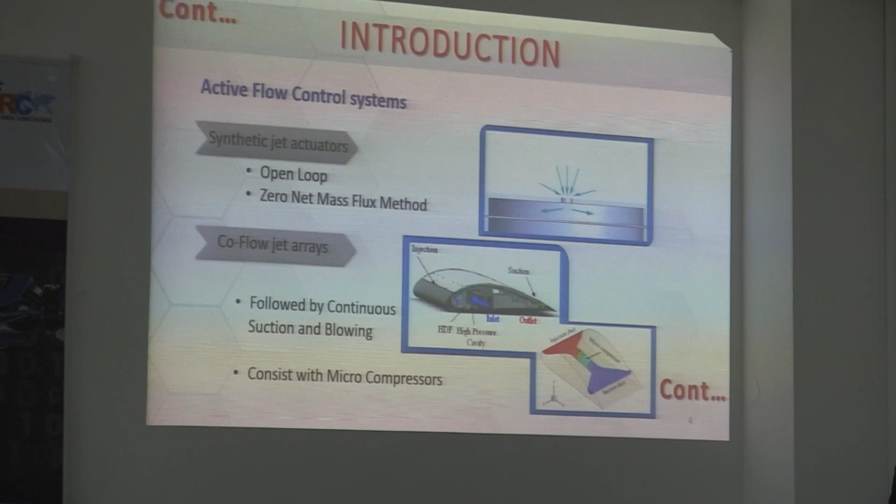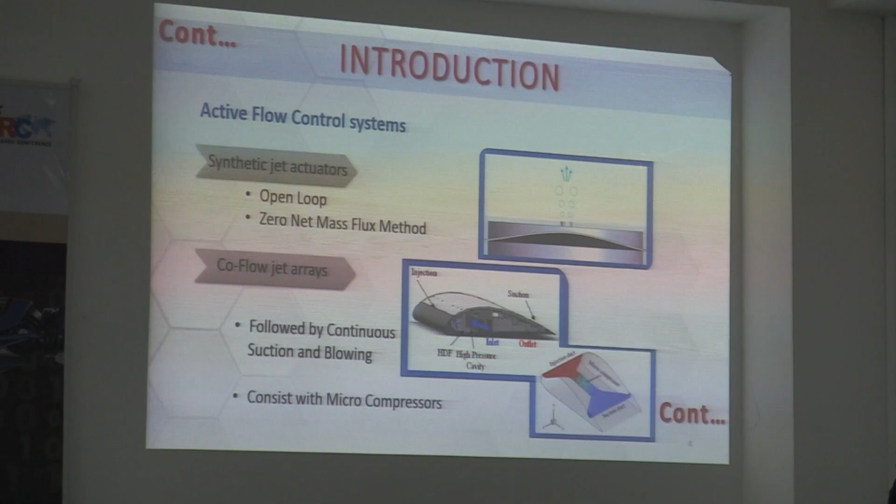There are many types of flow control methods. The synthetic jet actuators are known as open loop, and it is a zero net mass flux method, that is, the in and out mass flow rate is the same. The co-flow jet arrays are the method that we were concerned with. It uses continuous flow as suction, and it consists of microcompressors.

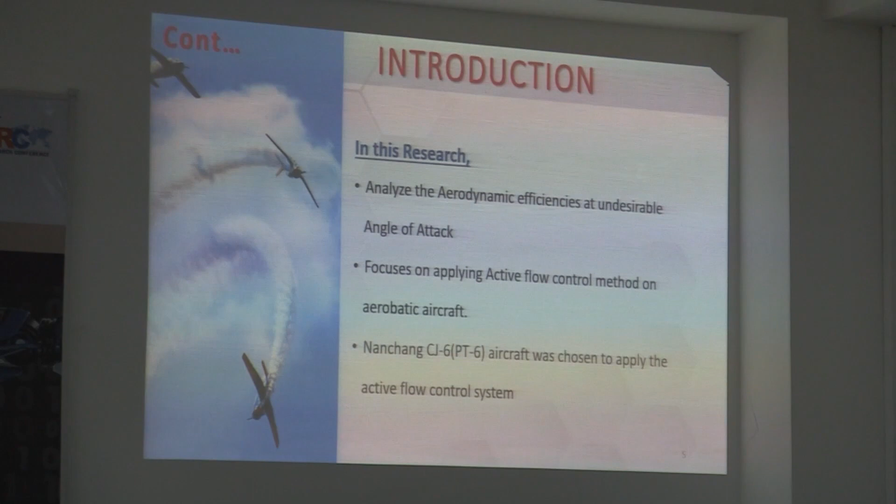This research was based on analyzing the aerodynamic characteristics at undesirable angles of attack, and therefore we focused on obtaining detailed data for the wing. For the wing we chose an aerobatic aircraft. Then we selected the PT6 aircraft. It is in the Sri Lanka Air Force fleet. It is currently used for aerobatic and fighter conversion training.

There are three main objectives in our research. The first one is to select an appropriate location to apply this suction and blowing, and the next primary objective was to implement the suction and blowing profiles in order to carry out the CFD simulation, and finally to assess the effectiveness of the application of suction and blowing.

There are four main sections in our methodology. The first one is the solid modeling, involving modeling of the original wing and the modified wing. Then the mesh generation, then CFD analysis, and finally the post-processing.

For the active flow control method, the initial idea was generated by studying the principle of synthetic actuators. Basically, it's a dual phase suction and blowing. In this research, we converted it into a single phase suction and blowing, that is, we placed one slot to suck the air, and then that air will be blown from another slot. And finally, it satisfies the law of continuity.

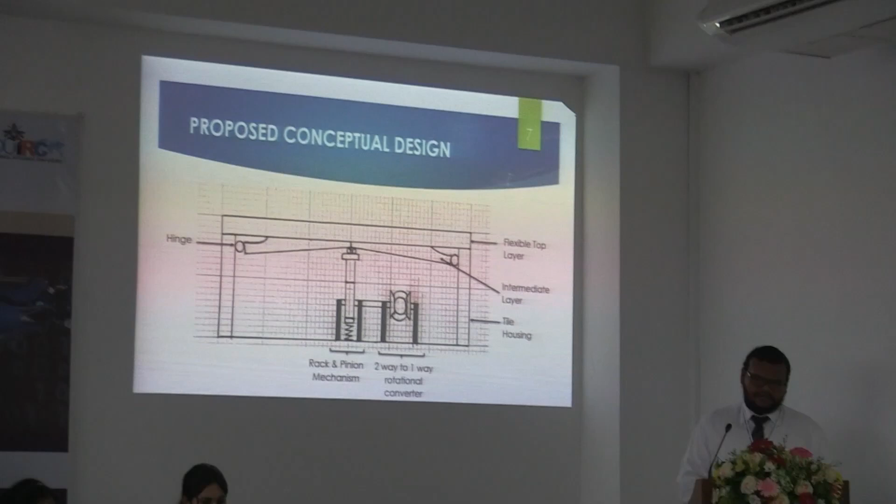So this is the conceptual design we proposed in the initial stages of the design, and we were able to go forward with it. This includes a flexible top layer, and below that is an intermediate layer. So this intermediate layer consists of 4 triangle-shaped layers, which are hinged to the side of this tile. So the vertical motion is converted to rotational motion through the rack and pinion, and the alternating rotation of the input shaft is converted to one-way using the two-way to one-way rotational converter.

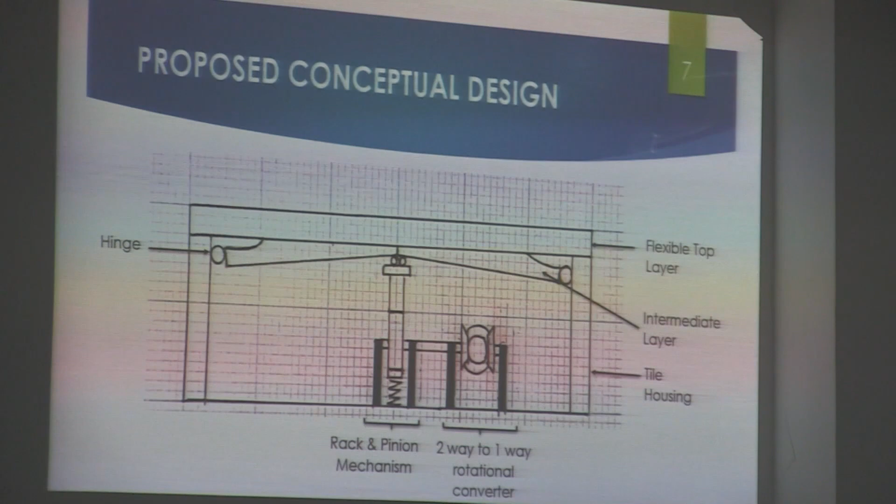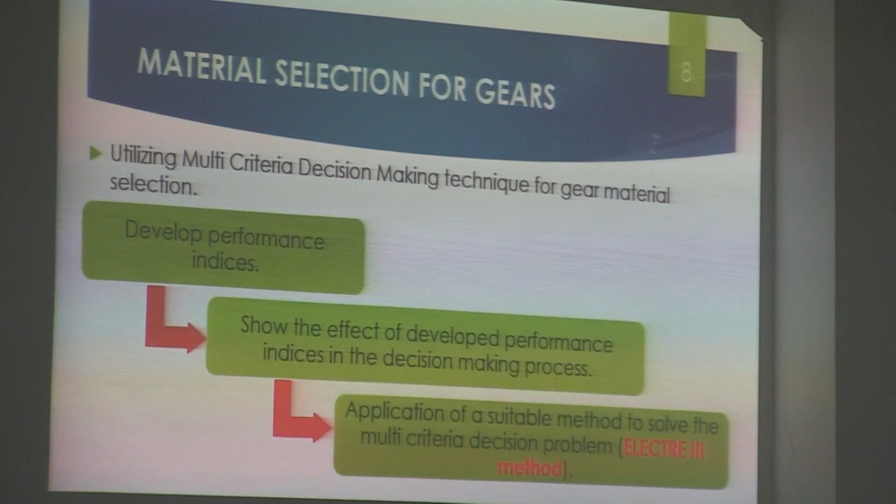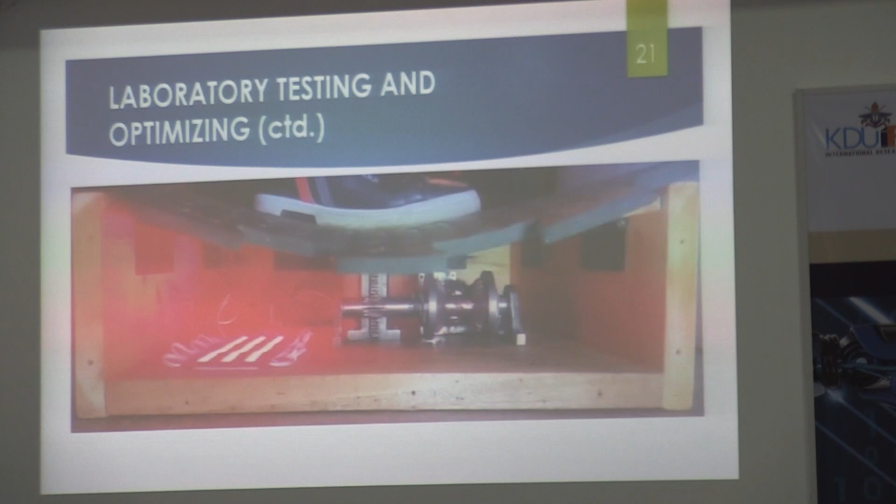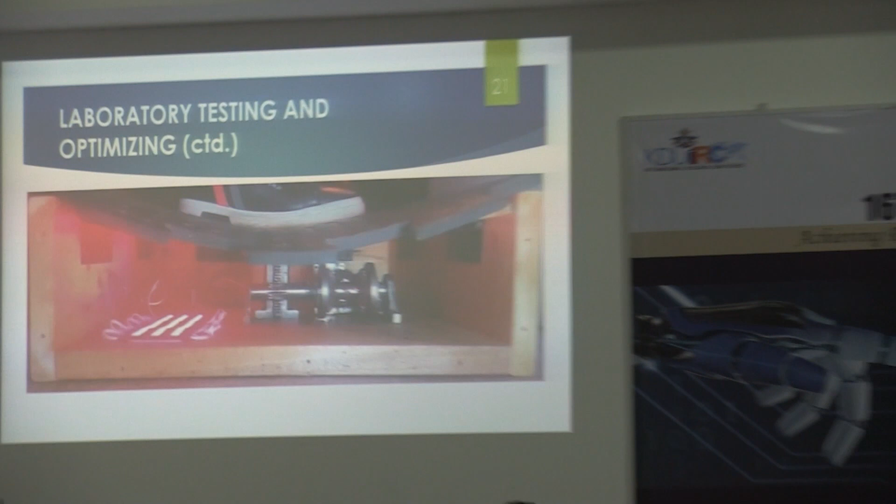This cost, you estimated based on your model or otherwise for a large area? For the model, but the dimensions are quite similar. The dimensions will change, but the materials will not change. Now, think about a large area. Your cost per watt will not come down.

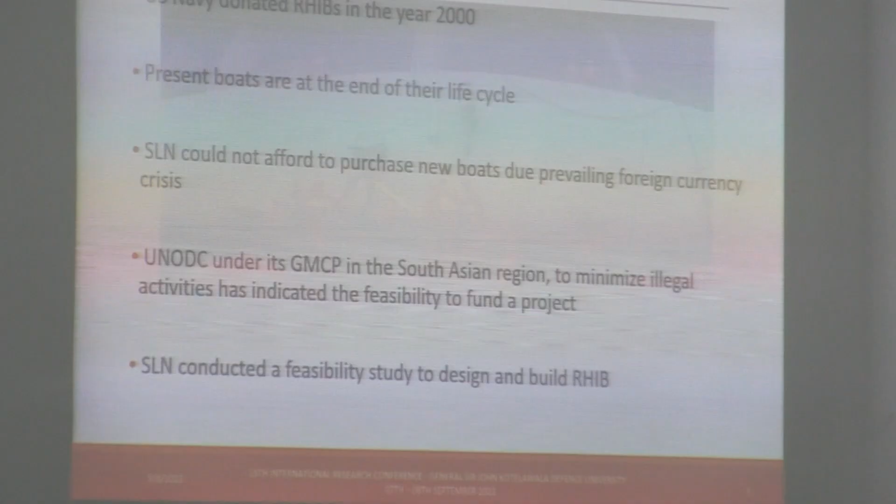The United States Navy donates boats to SLN. Those boats have been in use but are now approaching the end of their life cycle. Unfortunately, due to the foreign currency crisis faced by the government of Sri Lanka, SLN is unable to purchase new boats.

However, the United Nations Office on Drugs and Crime (UNODC) has indicated that it may be willing to fund the project to Sri Lanka Navy if the Sri Lanka Navy can design and build the RIB themselves.

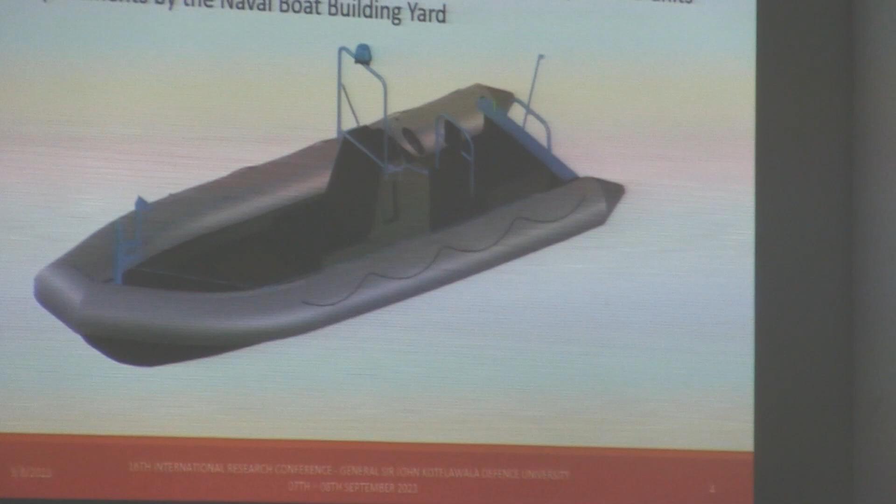So we conducted a study to see if it is possible to design and build a RIB needed for special operation units within the Sri Lanka Navy. The main question we aimed to answer was: how can we understand and address the crucial factors that determine the successful creation of a low-cost RIB according to the requirements of the Navy's special operation units, all within the capabilities of NBBY?

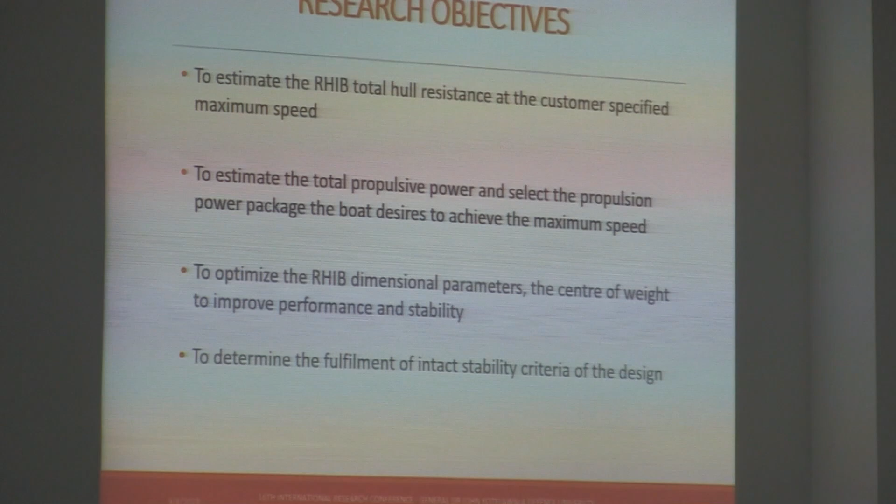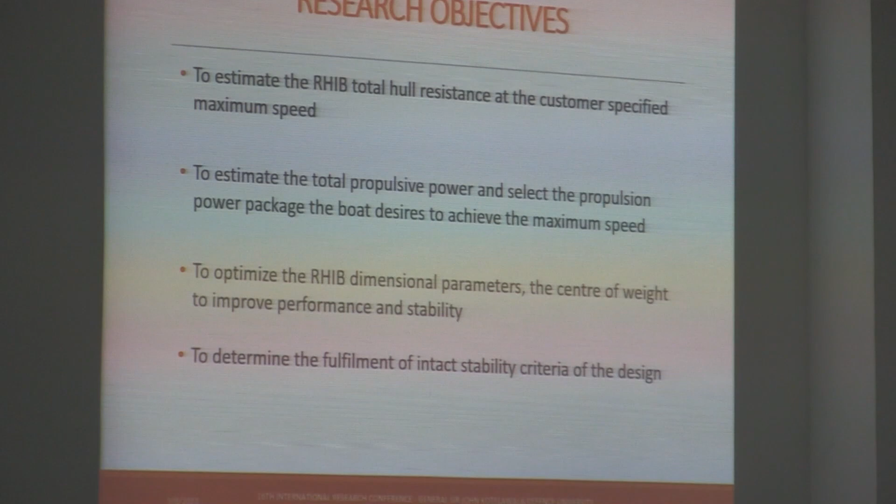We have covered our research under the following objectives. First, to estimate the RIB's total hull resistance at the customer specified maximum speed. Second, to estimate the total propulsive power and select the propulsion package the boat needs to achieve maximum speed. Third, to optimize the RIB's dimensional parameters and center of weight to improve performance and stability. And last, to determine the fulfillment of intact stability criteria of the design.

Our research methodology has focused on these areas.

We developed a 3D hull model in Rhinoceros 3D software following a comprehensive weight estimation considering all boat components, and we determined the center of gravity. Utilizing the hull shape and the new center of gravity, we calculated the initial draft and trim angle in Orca 3D software. Subsequently, we used NavCad software for the calculation of hull resistance and propulsion analysis.

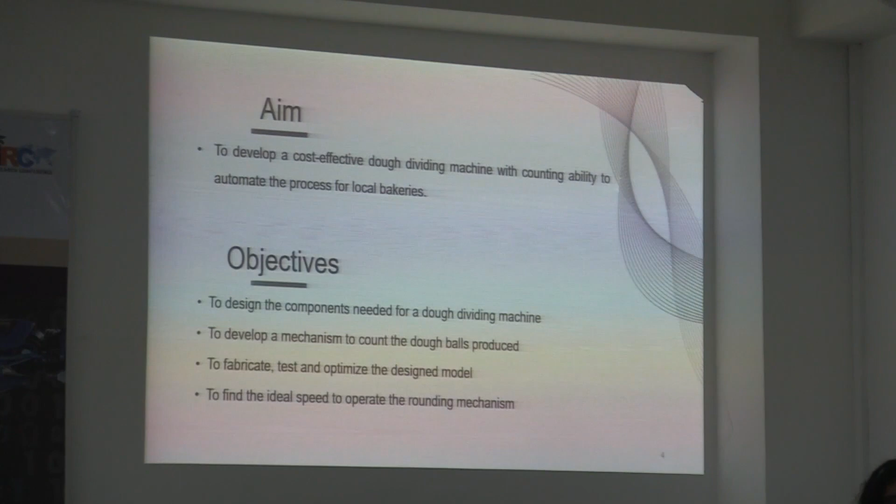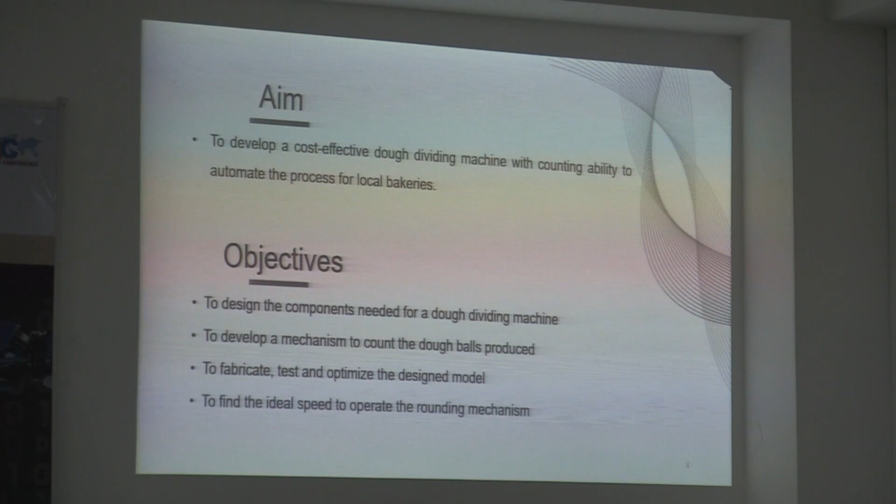Our objectives were to design the components in the dough dividing machine, to develop a mechanism to count the dough balls, to fabricate, test and optimize the model, as well as to find the ideal speed to operate the rounding mechanism.

We carried out a literature review on existing dough dividing machines, and most of the systems present have electric, hydraulic or pneumatic systems to operate the cutting mechanism. The type of dough divider that should be used depends on the effort required by the dough dividing machine and the type of dough that's used.

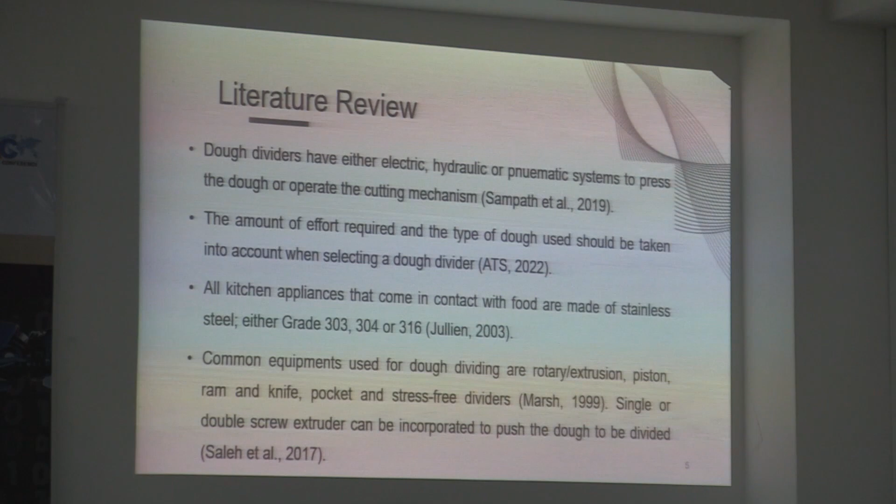The dough dividing machine works with food, and for machines that work with food, the material that has to be used is stainless steel. Stainless steel is mainly of 3 types: grade 303, 304 and 316. In our machine, when actually produced, we propose the use of stainless steel grade 304, since there are no acidic compounds requiring grade 316.

In order to push the dough forward to be cut, there are many mechanisms such as rotary extrusion, piston ram, knife, pocket, and stress-free dividers. In our project, we used double screw extruders to push the dough forward to be cut.

There are mainly two common types: press cutters, which are dough divider machines, and pneumatic or motor control dividers. The press cutters take the dough ball and make it into a circle placed in a tray. Using a circular shaped cutter, the circular dough is cut into little pieces and the tray is rapidly moved to create round, small dough ball shapes.

In the pneumatic motor control dividers, the dough is placed into a hopper and pushed forward through the extruder to be cut by a blade.

For our methodology, we first reviewed the literature, then reviewed the machines that are actually present and their components. We created a conceptual design, then carried out calculations to find the dimensions for the gears, shafts, couplings, and the chain and sprockets. Then we selected materials for those components and designed the model through SolidWorks.

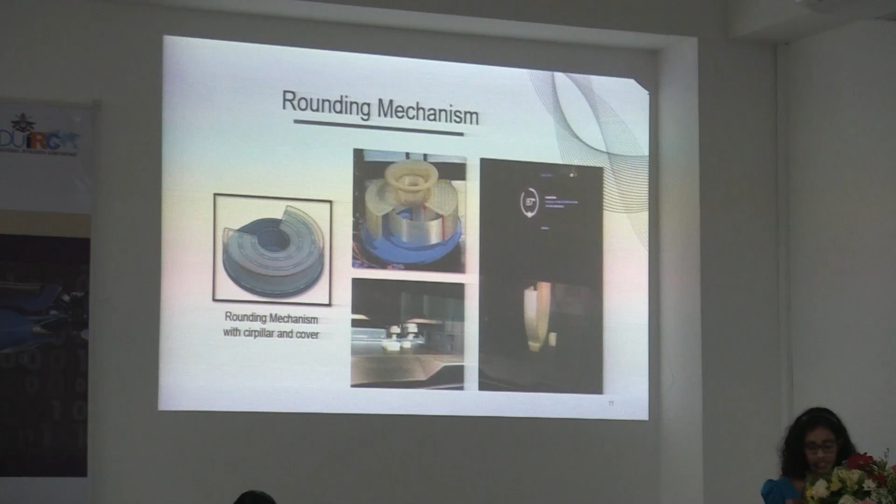This was the fabrication of the extruders and the rounding mechanism. Our actual machine, we weren't able to produce at full scale because of the country's economic crisis while we were doing this project, so we had a 2/3 scaled down model. For our rounding mechanism, we 3D printed the circular piece and the cover, using PLA as the material.

In order to turn the rounding mechanism, we had a motor and a light dimmer. Light dimmers usually work by varying the voltage given to a component, so we connected the light dimmer to the motor so that we were able to fulfill the last objective, which was to vary the speed of our rotating mechanism.

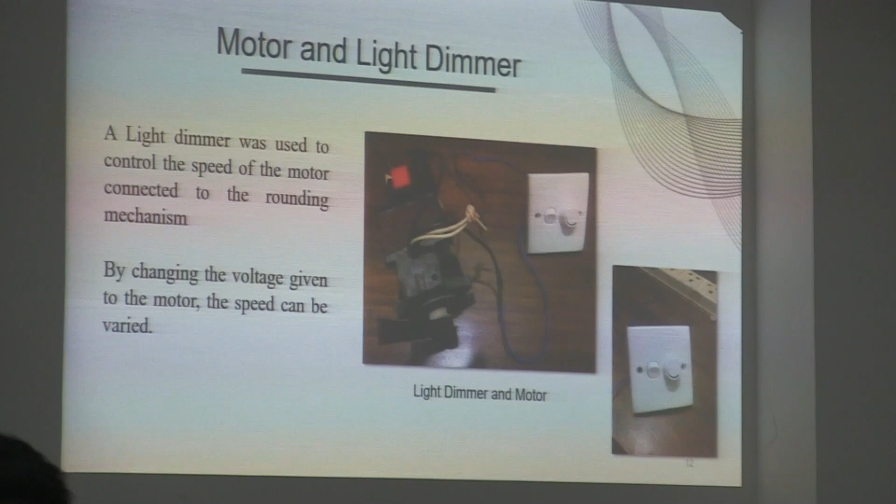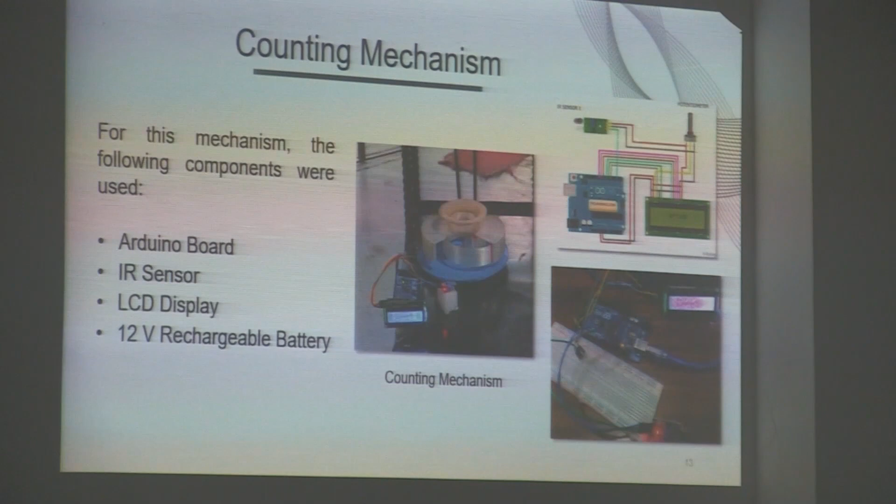In order to count the dough balls coming out of the rotating mechanism, we used an Arduino board, IR sensor, LCD display, and a battery. We configured code into Arduino IDE so that we were able to count the number of dough balls that left the exit.

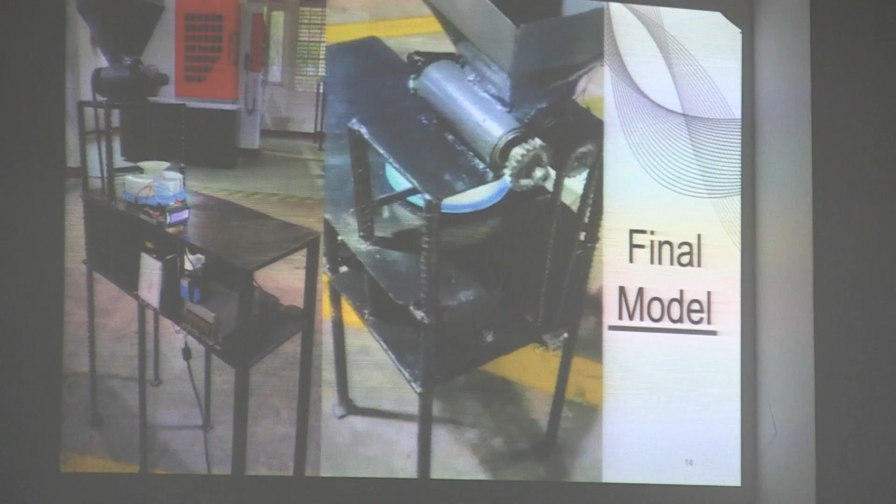As you can see in the video, this was our final model. The extruders were inside and we had a chain and sprocket. We included gears, and there was a gearbox inside. The cut dough balls would fall into the rounding mechanism, and once it exits, the IR sensor would detect the dough balls and count it on the screen.

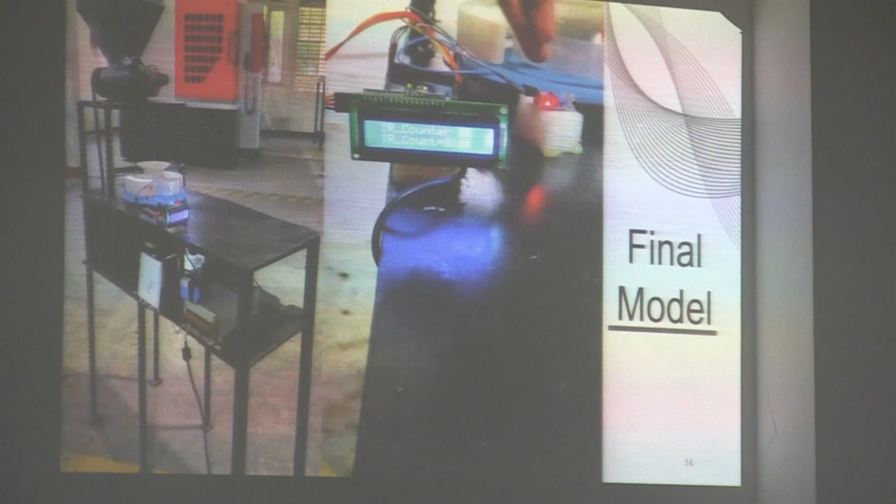So, in our results, one of our objectives was to vary the speed of the rotating mechanism. And so we varied the speed of that. And at 5 different speeds, so 50 RPM, 75 RPM, 100 RPM, 125 RPM, and 150 RPM, we found which speed produced the most ideal round-shaped dough ball.

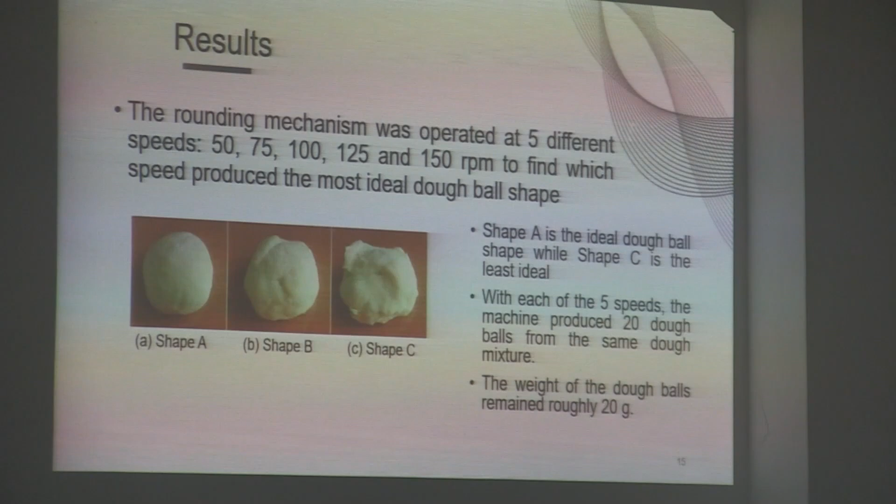So we took the 5 speeds and we produced 20 dough balls from the same mixture, and they had the same weight. And from these results, we can see that the most ideal round-shaped dough balls were produced when the rounding mechanism plate was turning at 100 RPM.

So some of the problems that we encountered was finding a suitable motor for the application. We actually used a wiper motor because that was one of the motors that could handle the high torque that we had in the machine. And the difficulty in finding that was because of the unavailability of the components in the market in that day.

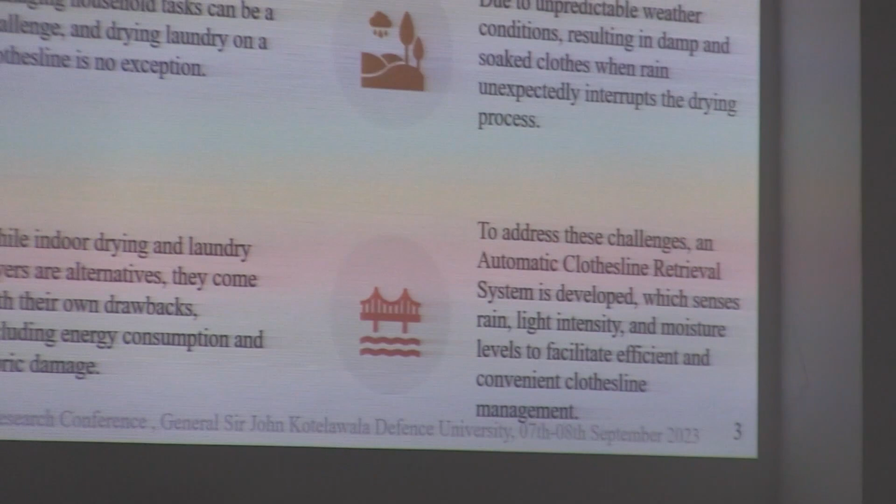So let me give you all a small introduction. I guess all of you have been there, especially during this rainy season, where you have to constantly think about unpredictable weather. I mean, it's pretty frustrating to keep your laundry outside, having it soak under unpredictable rain. Now, indoor drying and laundry dryers come as alternatives, but they have their own set of drawbacks. For example, high cost, high energy consumption, and fabric damage.

So to address all of these problems, our system was developed by automating the drying process. So the primary objective of this product is to enhance the user experience, to provide a comfortable home and work experience for the users, so they don't have to attend to their laundry matters.

Also, one of the key problems that we aim to address is that due to unpredictable rain, clothes will be in continuous contact with rain, further getting damp. So the drying process has to go in cycles and cycles.

Also, another thing is, how often do you all go back and forth to check if your whole cloth load is dried? With our system, these concerns are mitigated as the drying process is automated. So you don't have to do constant checkups.

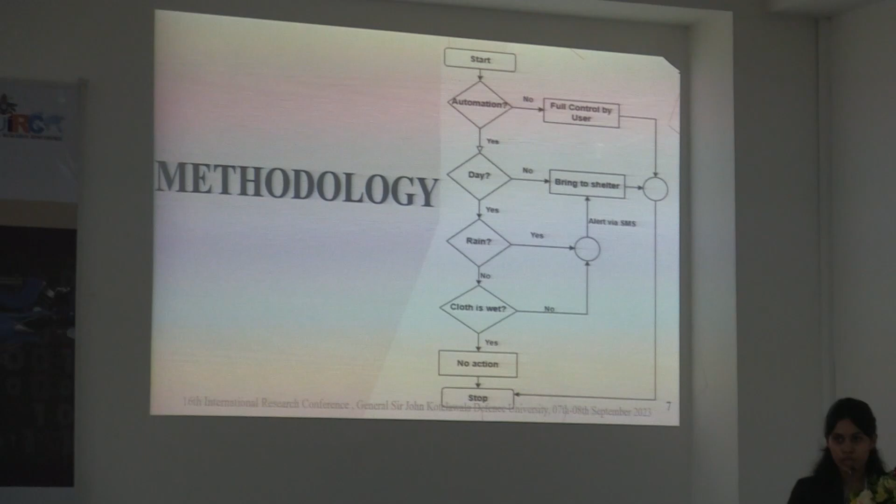So this is the main sensor integration of our system. It uses 3 sensors: the rain sensor, the light sensor, and a dry moisture sensor. Priority is given to the user. Depending on the requirement, the user can take the clothesline in or out using a switch. The program is adapted so the clothesline is kept in shelter at night.

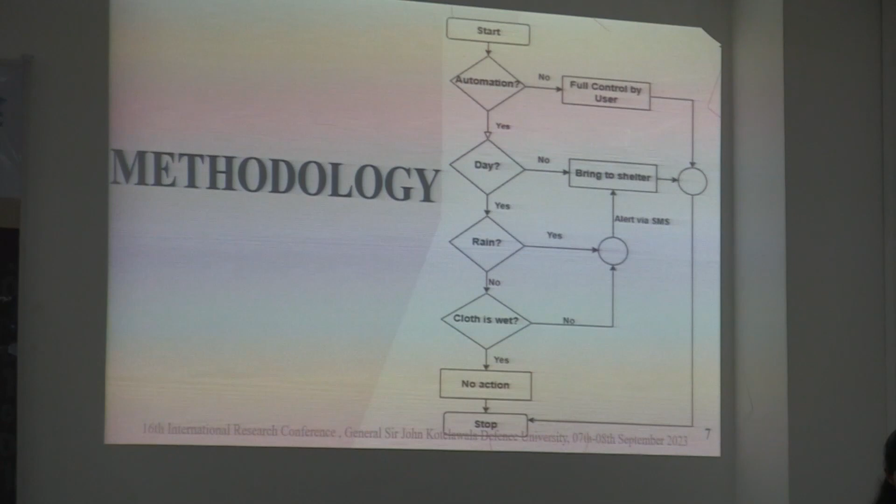And further, during daytime, when there is rain, the clothesline will come back inside to shelter and alert the users via an SMS alert. And when the whole cloth load is dried, the clothesline will also go straight inside, alerting the user that the cloth load is dried.

So there are 3 inputs to the microcontroller: the rain sensor, the LDR module, and the moisture sensor. Also, we have the switch from the user as well as limit switches. For the output, you get a GSM module giving alerts to the user, as well as a stepper motor and motor driver to control the back and forth motion of the cloth rack.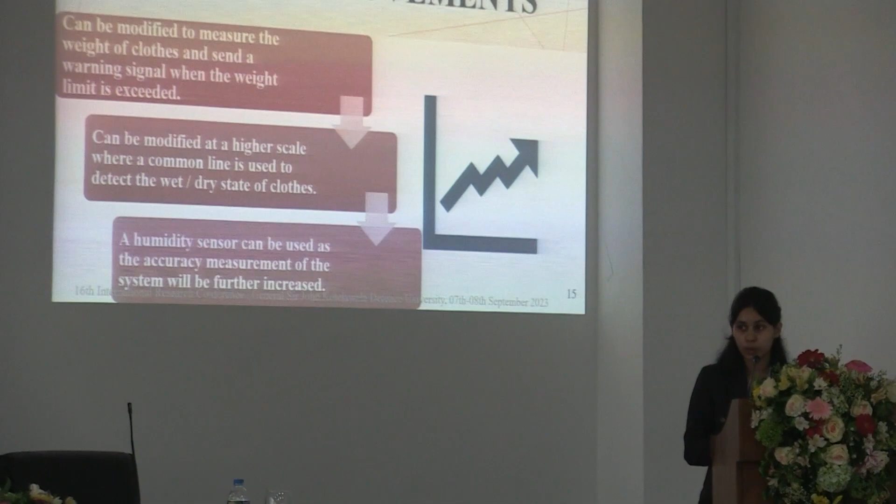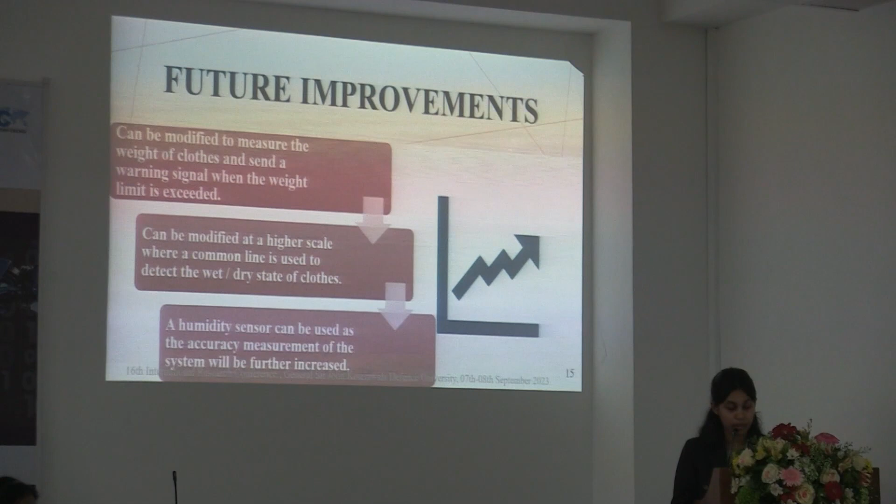So this model has more potential to grow. For additional features, we can use a weight sensor that can calculate the weight to prevent overloading and prevent the limit being exceeded. Also, the dry moisture sensor can be modified further to mitigate the limitations that I mentioned. To further increase the accuracy of the system, a humidity sensor can be used as well.